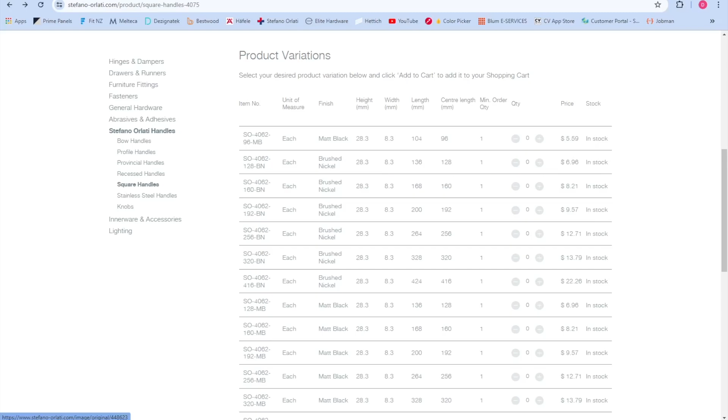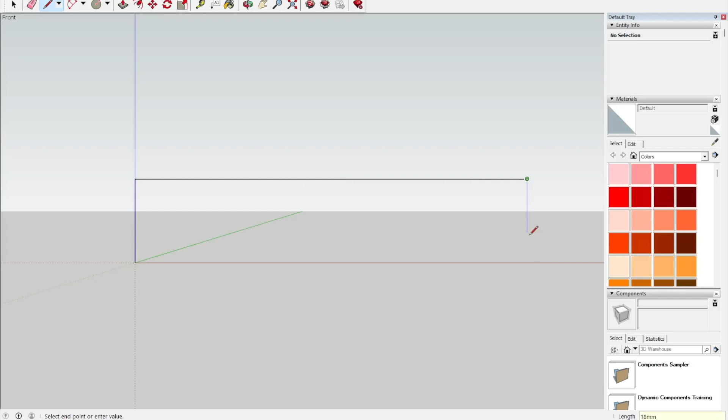So we've just opened up SketchUp now. I've got the details of the pull, so we're going to put the dimensions in. By the way, I'm no expert in SketchUp or importing pulls, but I thought I'd do this tutorial to hopefully help you.

So just going in, we're drawing it. It's going to tape measure. We're going to come in 9mm, because I've had a physical pull with me, so I can see it.

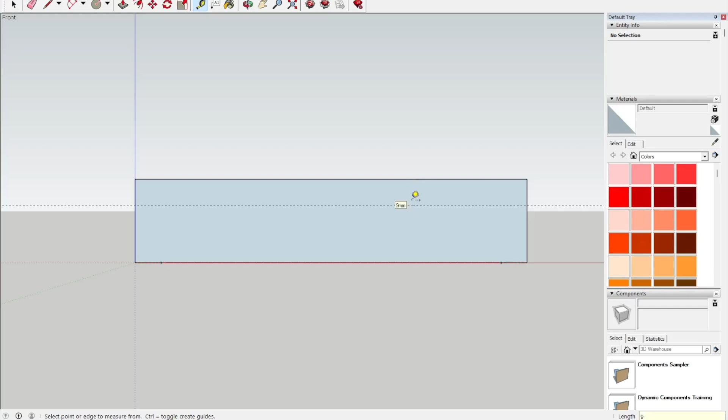I'm just going to draw some lines. Draw the lines, and then we're going to get the eraser out and delete the parts, delete these lines here.

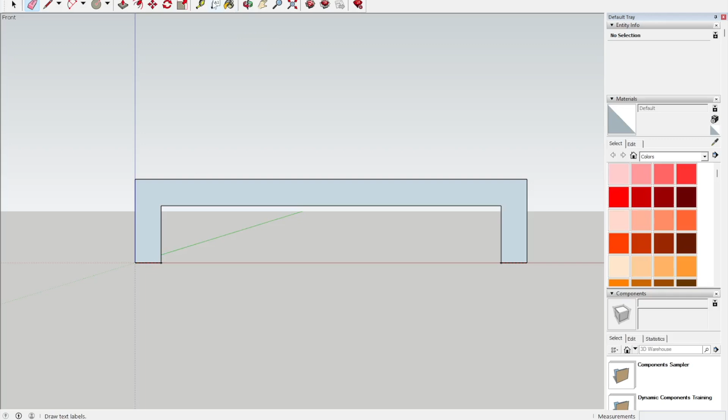Now what we're going to do next is some more guides, because we need to do a radius on these corners. So I'm going down 3mm and in 3mm, and I'm going to do a circle, because I'm not proficient in SketchUp, so I thought the easiest way is to just do a circle, measure in and do a circle, then just delete it.

There we go, you can see, and deleting those guides as well. So we'll do that on the inside too, on both sides. Just going to go in, measure in, then go back and do the circle.

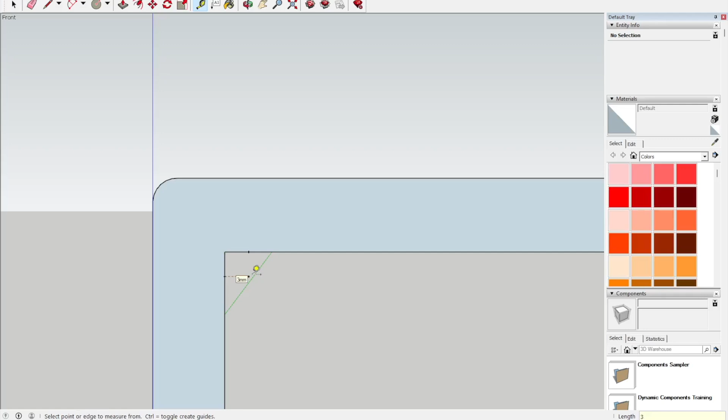Just clicking up there now. Oh, didn't click it quite right, so just go circle, go in 3mm. Then we can get the eraser and go delete, delete, delete, and delete the guide.

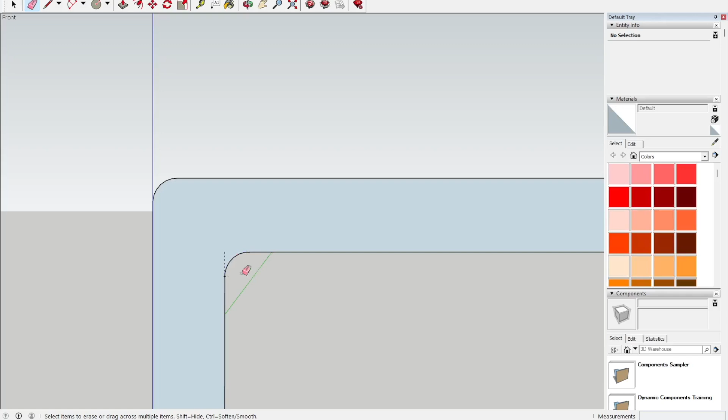So now we're going to go to the other side. It's quite a quick and easy process, but I'm just trying to show you. If you're proficient in SketchUp, you'll probably have it done a lot quicker than me, and you'll have your own ways of doing things. This is just a quick example.

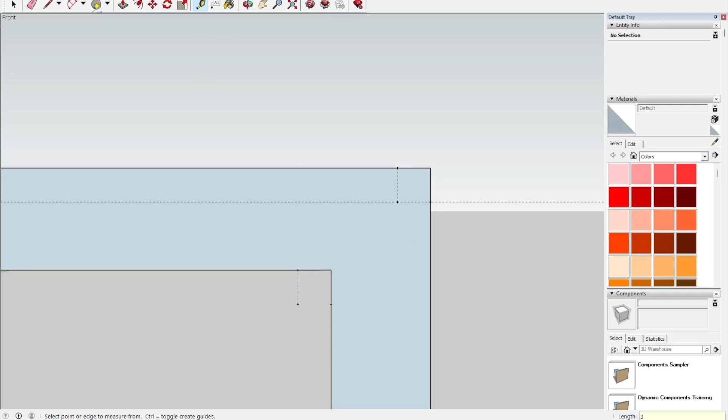So go in, go out for that one, go down 3mm, then we'll go down in 3mm. Just do those guides, and now we'll get the circle out and just go there.

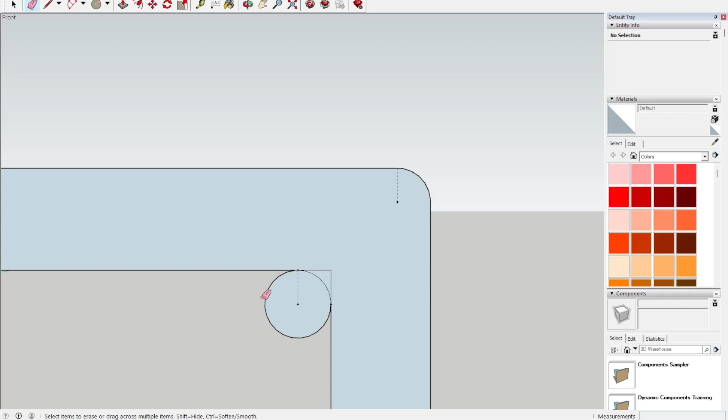3mm. Oh, haven't quite got that. Oh yeah, got it in the end. Just get the eraser out, delete these lines. Delete that, we can delete that and delete that. Now we can go back in and delete our guides.

We'll delete the guides. So what we've done now, we can pull it in to the measurement that was shown. Just type that in on the bottom, and you can see that pull's pretty much done.

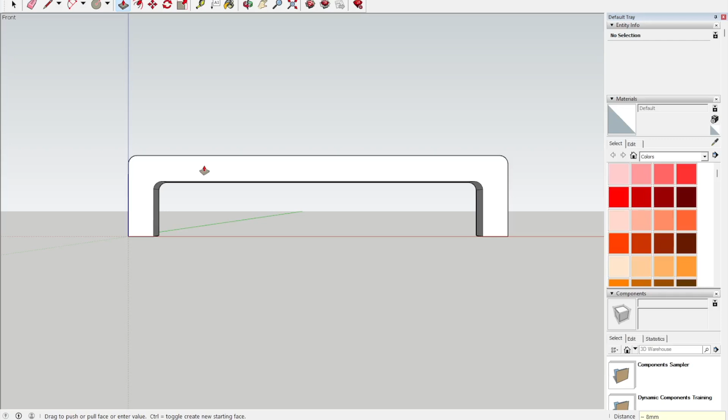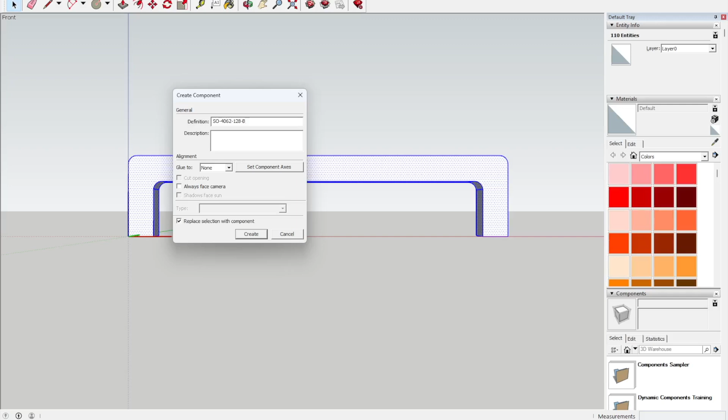So we'll just make it a component. We'll quickly select it and make it a component, just give it a little name. Just going to call the component something - this is the handle, it's a Stefano Orlati pull - so we'll just give it their code for the component. Just quickly finish wrapping that up.

Now we're going to save it. Just going to find the directory where I want it saved, and I'm just going to save it under this name here, so it's going to make it easier when I find it and import it into Cabinet Vision.

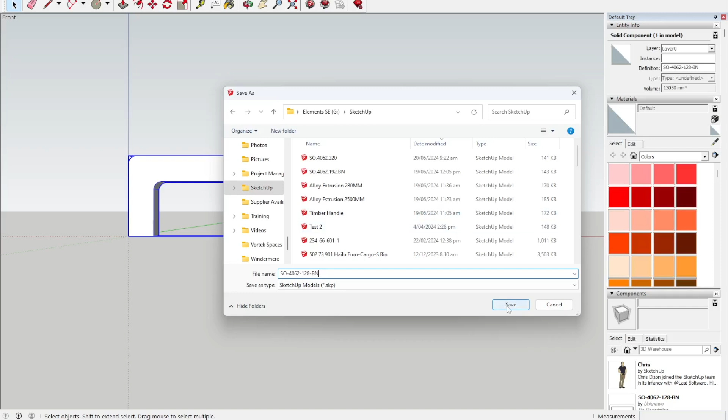Just quickly finish up writing that up. Just going to do a quick orbit and check around, but yeah, that's done. It can be quite quick, some of these pulls, like these bar pulls.

Now we're going to go into the material manager. I'm going to open that up, go down to pulls, just have a look. We're going to create a new pull, just going to call it the name that we want.

And I'm going to give it a description. Now we're just looking at the pull, number 2 best represents what we want, so we're going to click that one.

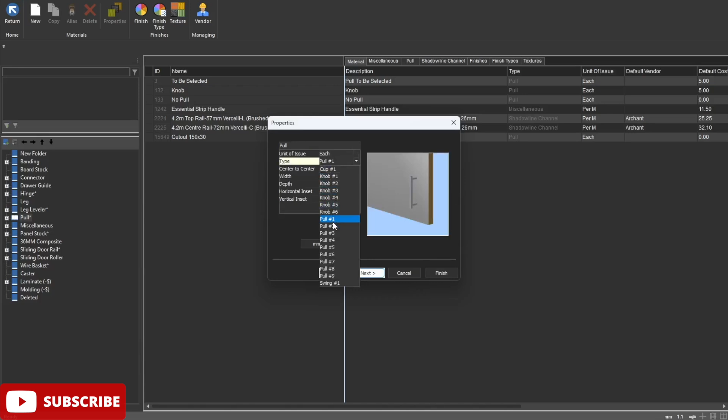I'm just going to show you some other ones. The diameter there is showing is for the bores for the handle drilling. This is showing the textures.

So what I've noticed, I've just put it in a generic pull, so I'm just going to drag it into the correct place where I want it, which would be Stefano handles. As you can see, I've got some other ones that I've created, so I'm just going to drag that in. I always like to set vendors for stuff, so I'm going to select the vendor.

And I always like to set a price, so if we have to price a job, it's always correct. It's just a habit of mine.

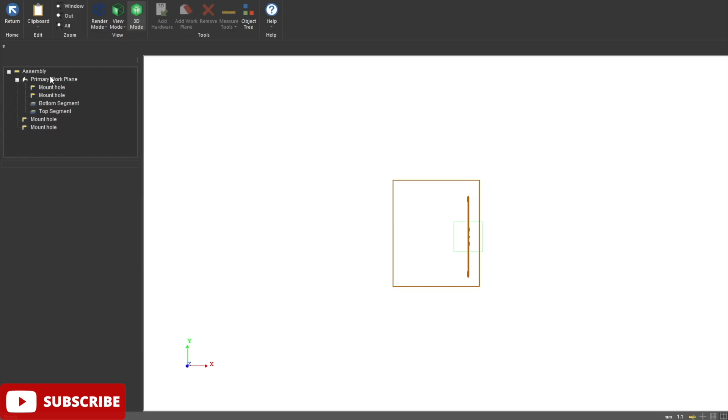So first off, we've got the primary work plane. You can see there it's got the 2 mount holes, the X position, the Y position.

Go back, I'm going to pull. There's going to be the horizontal inset and the vertical inset. You can see there, and these are the textures, the layers, and the textures.

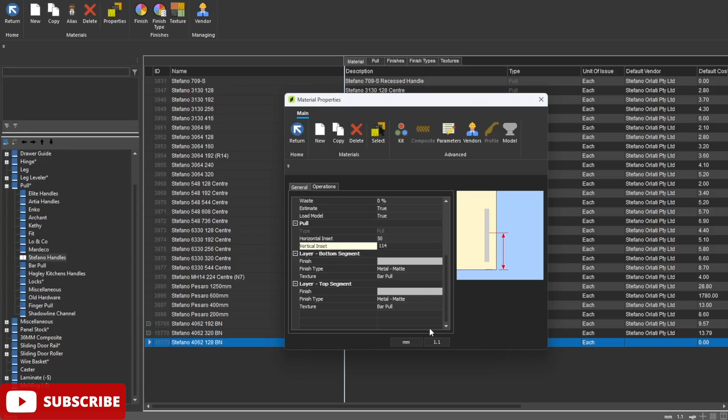This is the horizontal inset we're going to set, so it's 50 mil. We want it 50 mil in, so yeah.

So I've gone to the primary work plane here. Just going to delete this model because we're going to load this one that we've got in. As you can see here, it's going to these mount holes, so we haven't set it up correctly when we first did it.

So we're just going to set it, so it's 128, so it's 64, and the other one will be minus 64, and the DX is 5.2 because it's a through drill for our machine.

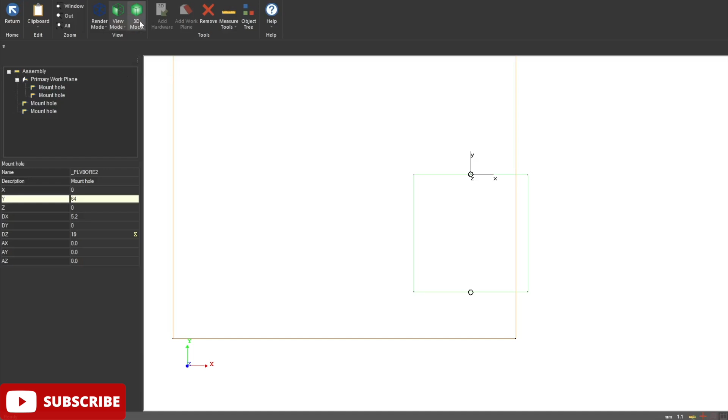Just go back to primary work plane. We're going to add the hardware. This is a pull that we created, so just going to get it in the right position before we put it into and load it onto the work plane.

So now we're going to line up the handle into position. So I've got the offsets of these drawings, so I'm just putting in the X position and the Y position. Then we're going to make sure it all lines up, the drillings line up where it needs to be.

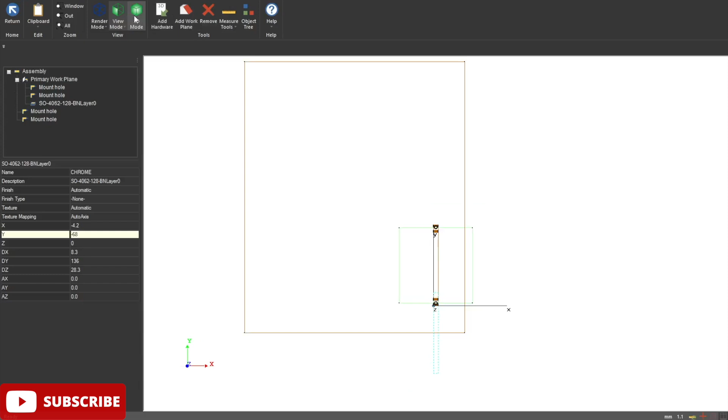Just doing a quick little view around now. I always like to get in the 3D view. You can see the drilling on the work plane lines up where it needs to be. So I'm going to save the changes. Yes.

So now I'm just going to look at these finishes and textures. So it's a brushed nickel. I'm just going to do a chrome texture, then search for that and go OK.

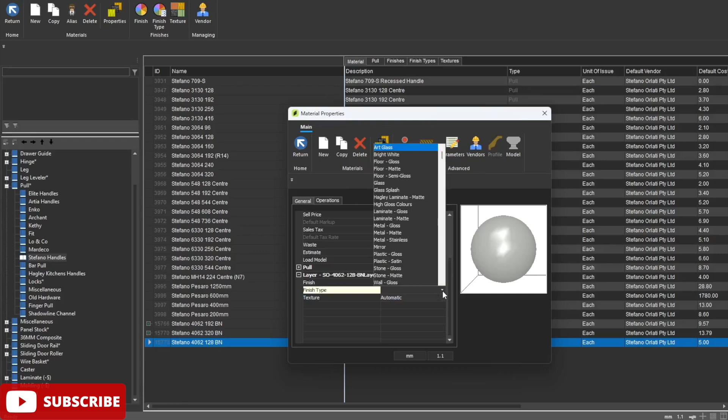Then I'm going to set the material texture, so I'm just going to go metal stainless and another one. So I'm just going to call this a bar pull texture. It's just a silver kind of texture.

So go back. So what we're going to do now is we're going to create a schedule. So go to assembly, I'm going to go to pulls, just going to look for, go down.

You can see another one, so we're just going to copy that. It's just easier to rename. Then we can rename it: 128 bar pull Stefano. So yeah.

Now we're going to look for the pull we just created. You can see it's down the bottom there, and we're just going to load that in, change that.

Go click on a new job, going to select the room. I'm going to set the hardware as a new pull. Select that one we just created.

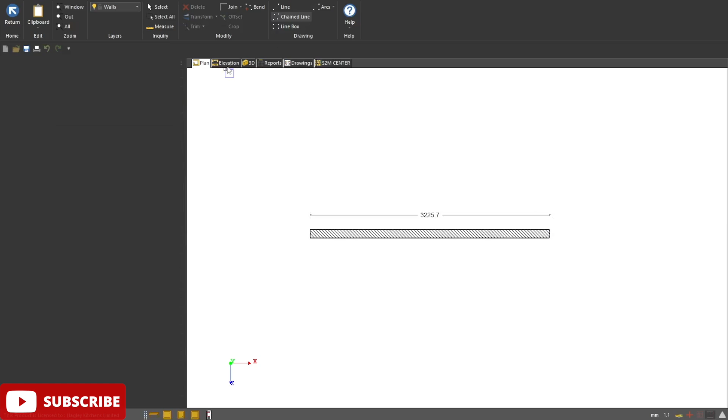We're just going to have a quick wee test, just make sure it's showing up alright. So just draw a quick wall. Elevation objects, we just throw a cabinet on the wall.

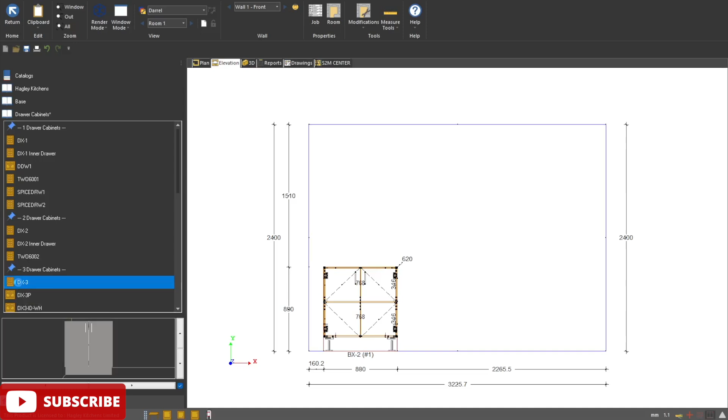Just do a door, two door base, just throw that there. I'll throw a drawer cabinet there as well, just so you can see both how they work.

So just going to zoom in, double click on the base drawer unit, just going to go texture.

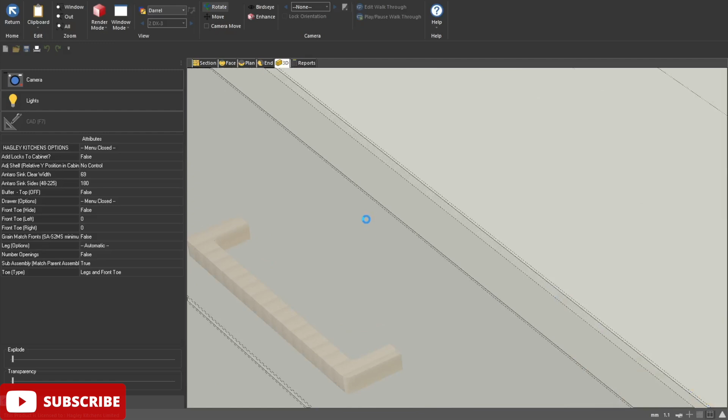Just have a quick look at it. You can see that pull that we just created. Render texture. So wire mode.

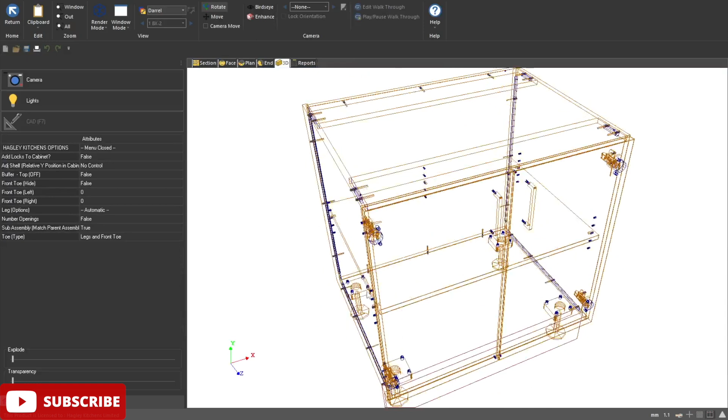Now we'll double click on the base unit. We'll have a quick look.

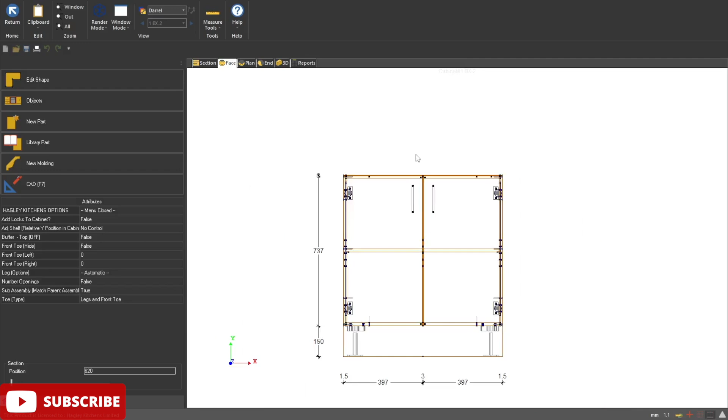Now we'll just have a quick look at these measurements for the offset. So that's 1.5 and 1.5, so that's those horizontal and vertical offsets. Yeah, so that's looking pretty good. Yeah, and that's about it.